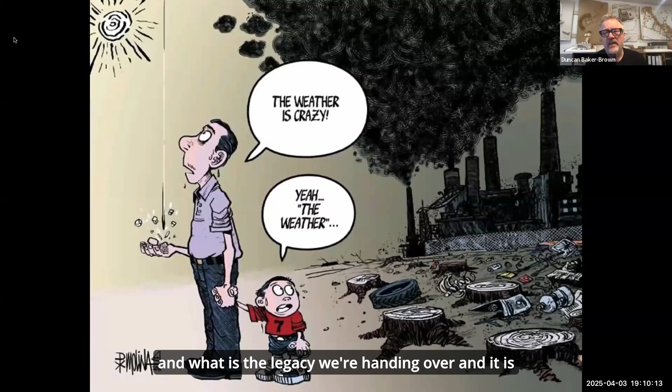And we're really in this situation where the grown-ups and the really old people are in charge, and what is the legacy we're handing over? And it is quite scary. From the point of view of resource extraction, which is something that concerns me, 10 years ago humans extracted between 45 and 60 billion tons of raw materials every year from planet Earth. Move forward a decade to 2024, that's nearly up to 140 billion tons of stuff. Raw materials mined and harvested by humans every year.

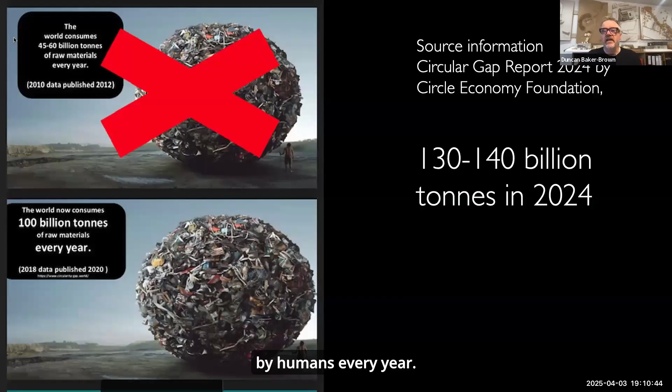This is a recent news item from The Guardian saying that that's going to increase by 60% by 2060. A UN report says that, and I think it's easily going to do that because it's doubled in the last 10 years. So another 35 years from now, I think it's easily going to double again, unless we do something about it. But yeah, that's 2025 so far.

Nutty geopolitics, wars, and MAGA tariffs. And resource security being a thing of the past. We don't know how much things are going to cost, let alone whether we can get hold of them in the first place, or whether we want to because of the problems associated with extraction of materials and harvesting of stuff, the collateral damage caused by doing this.

So why us in the construction industry? Well, the construction industry consumes 50% of those billions of tons of stuff that's mined and harvested every year. Half of all the stuff is consumed by our sector across the world. And it's the environmental destruction associated with this process that is one of the main factors for generating the current

mass extinction of species. Taking it back to the UK, in the UK, we consume 600 million tons of products a year. That generates a waste flow of about 200 million tons of waste a year. And the construction sector is 63% of that 200 million tons, 120 million tons of material goes to landfill and incineration, and it's from our sector, the construction sector. In addition to that, you can say that our industry is also about 45% of carbon emissions.

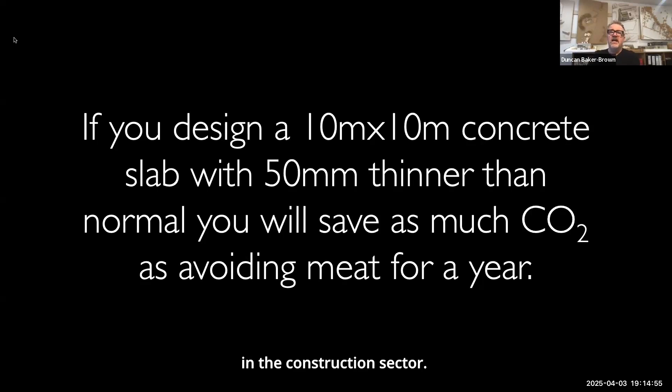So some good news. Well, we actually know what to do. And we're a really impactful industry in the construction sector. If you design a 10 meter by 10 meter concrete slab and you make it 50 millimeters thinner than normal, you'll save as much carbon as avoiding meat for a year. The other good news is that everybody's still asking, what is a circular economy? And here you can see I've got two circles.

One's the biosphere, the natural organic stuff that grows, locks carbon when it grows. We process it and make it into things. We use those things. We might repair those things again and again. And as long as we don't add toxins to those timber things, for example, they can eventually go in the ground and become compost for new things to grow. However, that's only a minor part of what we produce as humans.

And we're a lot more likely to be producing stuff in what we might call the tech sphere. So that's materials, minerals, metals, whatever, that create our smartphones, our cars, our furniture, the televisions. These things need to be designed so they are material stores for future things, because these things can't be returned back into the earth. So think of current BMW cars have to be the source material for future BMW cars. That is the challenge for all designers. Current buildings are the material stores for future buildings.

Now, more good news, the Pritzker Prize, the biggest international prize in architecture, was won a couple of years ago by David Chipperfield, well-known architect, saying retrofit, which is reuse and adapt the existing, is not only the right thing to do, it's the more interesting thing to do. And I agree, it is. Adapt the existing thing. We've got movements like the wonderful Don't Waste Buildings, campaigning to stop demolishing buildings in the UK.

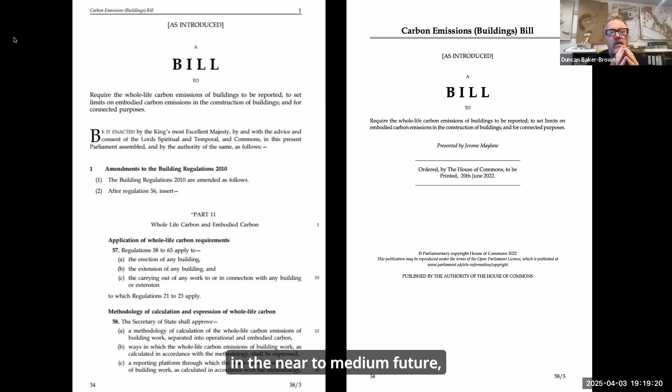So perhaps we'll get one of these soon. This is one of three bills that were presented to the Conservative Party when they were in government between two and three years ago. These are 10-minute bills asking for a whole life carbon, embodied carbon bill, and that almost got passed with a Conservative government. So I'm hoping if this gets represented in the near to medium future, it will instigate what we've been looking for for ages, which is what some people are calling Part Z.

That's the part of the building regulations that will benchmark and legislate for embodied carbon. As soon as you're limiting embodied carbon in a construction project, you're limiting the option for demolition, throwing away and starting again, because the whole life carbon footprint is just too excessive.

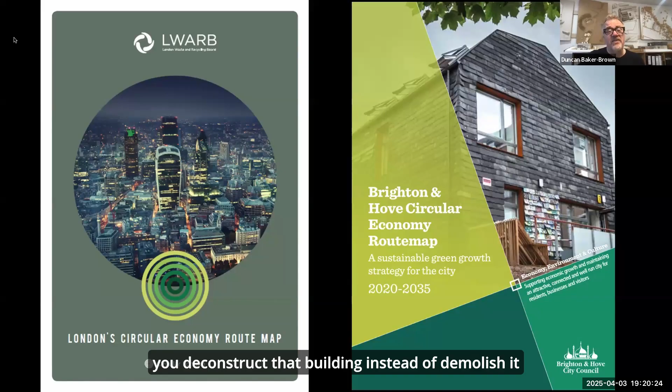The other good news is that now up to hundreds of towns and cities in the UK have circular economy route maps, and they are impactful. In London, as part of the London Plan, the circular economy route map has encouraged startup companies who do deep surveys of existing buildings so clients understand the material resources of their buildings. If you have a project over a certain size in London that you want planning approval for, and it involves demolition of a building, the Mayor of London's going to make you deconstruct that building instead of demolish it, and look at ways you can reuse those elements. The same for the Brighton and Hove circular economy route map, which I was involved in writing.

Most stuff manufactured and consumed flows into cities, whether that's water, food, clothes, or construction materials and products. But at the moment these things flow in and flow out, and these different flows don't talk to each other. If you're trying to instigate circular economies, some of these linear flows in and out have to turn back onto themselves, turn into circles, perpetual circles, where there's no such thing as waste. Waste from one of these flows is a resource for a neighboring flow.

So we need to consider our cities as material stores for the future. We need to become urban miners searching for new material sources to reduce the need for natural raw materials. This is something we did years ago, over ten years ago, we built this. Well, I say we built it, over 360 students built it. It's the Brighton Waste House, and it's actually Europe's first permanent building made of 90% material discarded by others. But if you say it's a permanent public building and it performs to Passive House standards, it's a world first.

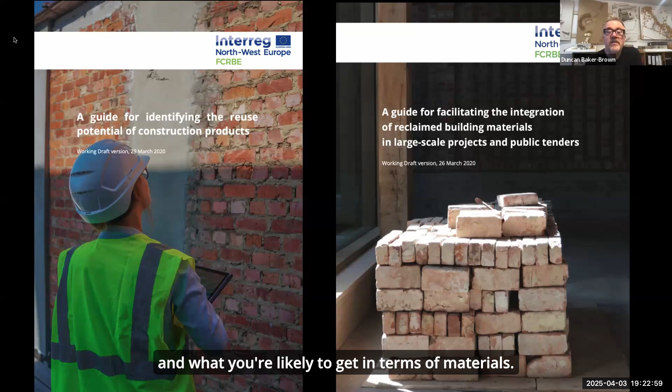And they're guides to how to identify how to deconstruct buildings from different eras and what you're likely to get in terms of materials. And this is the obvious one, bricks from buildings with lime mortar joints, sort of 19th century, early 20th century buildings. That's the easy stuff. But what about the 1960s buildings with a lot of concrete, steel and glass? So guides on what to look out for.

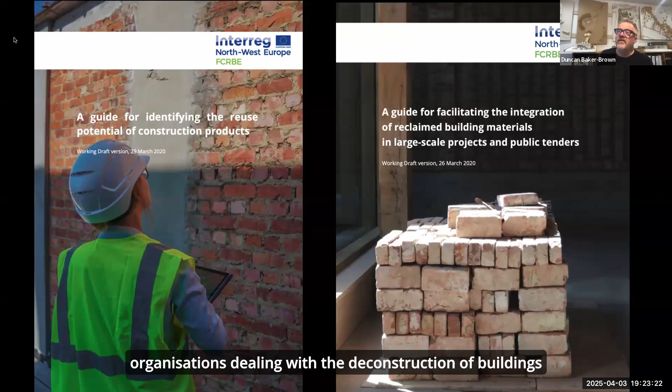We're putting together a directory of over 1,500 organizations dealing with the deconstruction of buildings instead of demolition, and crucially the reuse of those deconstructed elements. And that's across 6 countries who took part in this project.

Now, my main role was to curate a summer school, which was going to happen in Brighton in 2020, which was obviously the lockdown year. And we called it the School of Reconstruction. And originally it was going to be in August 2020. And the city of Brighton gave us this school, this secondary school to borrow for three weeks.

And we invited students from across those 6 countries, engineering students and design and architecture students, to bid for the 80 places to take part in the summer school. And we got 80 students. And the people you can see there, they're the team leaders. They were working mainly in pairs.

So we had this lovely situation where the city of Brighton were prepared to deconstruct a building that they'd previously put aside for demolition. So they were really helping us. I actually had to write a brief for a demolition company to deconstruct rather than demolish. So carefully take a building apart and then stack those parts up in the playground where our School of Reconstruction was. And then for 3 weeks, we had 10 teams of 8 students. They were going to reappraise this material.

What was really interesting is that the city were then prepared to put the material out into their supply chain and see if anybody would go anywhere near this secondhand material. And that would have been amazing, but for COVID. So what you're looking at here is the event didn't happen, we then did it online a year later. And the reason I dwell on it is because a year later, obviously we lost the face-to-face aspect of it because we did it online.

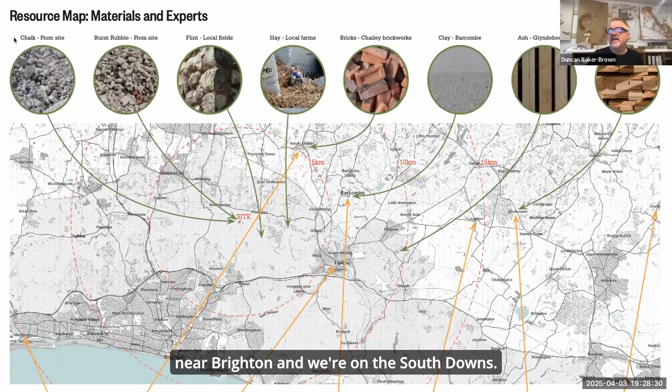I'm actually going to talk about one of our own projects. So we're based in Lewes, near Brighton, and we're on the South Downs. And this is a resource map that we do. We do one of these for all our projects. We look at the materials on the site, what it offers, and then what materials and resources are nearby, 5 kilometer, 10 kilometer, 15, 20 kilometer radius.

And that can be all sorts of things, waste materials from factories, from building sites. We actually locate planning approval sites, and see if those sites have had their F10 certificates issued, which means they've started on site.

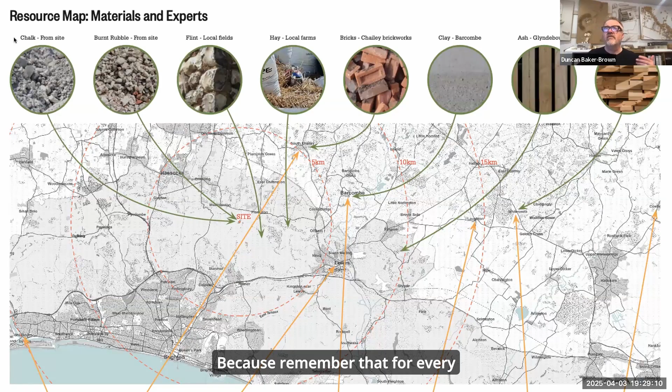We look at what the project is and what the likely waste flows from those building sites are, because remember that for every 5 or 6 houses we build in the UK, 1 house worth of waste goes to landfill and incineration. So there's lots of waste flows from our industry. There are also these other things going on.

So unfortunately, we've got this catastrophic ash dieback that's passed through Asia, Europe, and now through the UK. We have got tens of thousands of ash trees being chopped down at the moment because they've got this fungus infection, and they're being chipped and burned, which is a travesty, because all these organic things that grow lock carbon. The last thing you want to do is burn them because that releases the carbon.

We had a project at Glyndebourne Opera House, and while we were designing the project, they were chopping down 400 of these trees that had ash dieback. And these trunks here were just getting on a lorry there to be sent to a power station to be chipped and burnt.

We rescued them. We had a timber expert have a look at them, and he thought that they were reusable. So we got them sawn into planks and dried, and then we put them aside for the project. We then had another situation with a project on the South Downs where a house burnt down.

The original project with Glyndebourne Opera House didn't happen because post-COVID, they didn't need the accommodation they thought they needed pre-COVID. A lot of performance buildings, theatres and cinemas, etc., are suffering from reduced numbers of people going to see them. So we had this ash dieback timber that we were able to sell to the client who was having to rebuild this burnt out house.

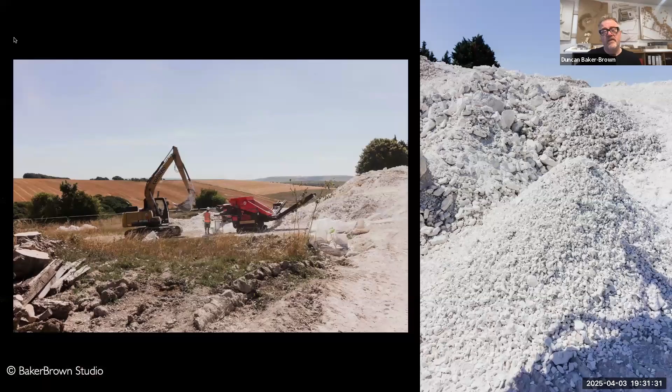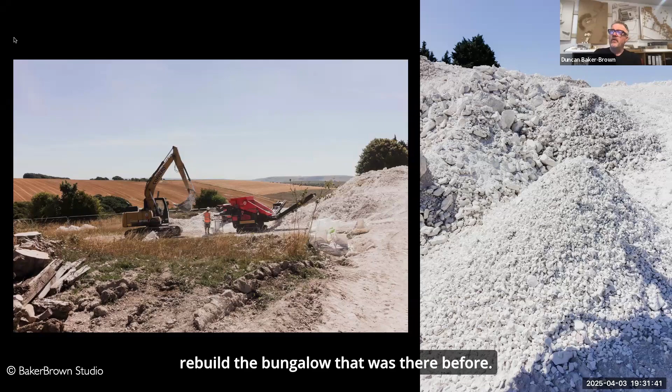The South Downs National Park wouldn't let us, and well, not that we wanted to either, but they wouldn't let us rebuild the bungalow that was there before. And by the way, it is a bungalow, but it was an 8-bedroom bungalow. It's massive. So they asked us to cut and fill the new building into the south-facing slope of the downs where the bungalow had sat.

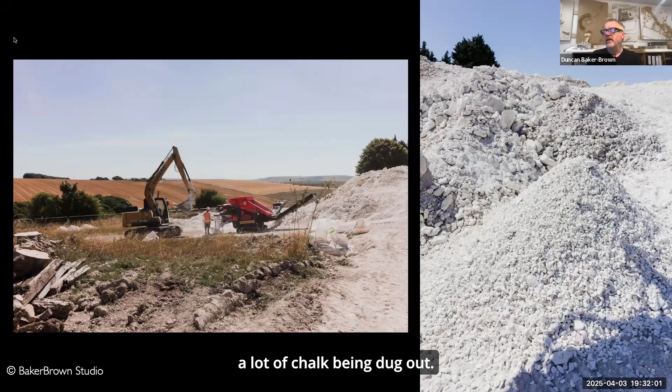And so from the point of view of people walking past, what they saw was what looked like a quarry, a lot of chalk being dug out. But I can say what you're looking at there on the left is the chalk being reprocessed. So it's been ground down into smaller elements so we could use it to create plaster for the new house.

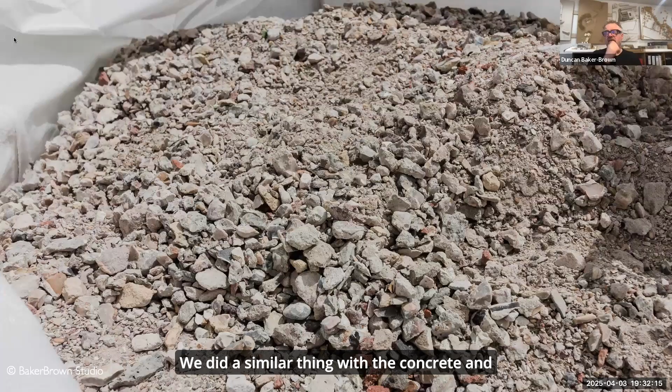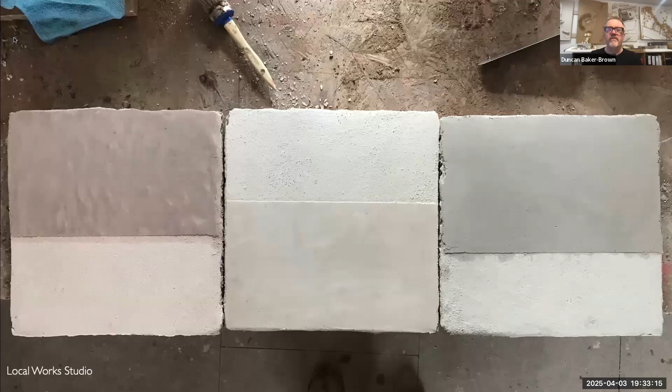And here we're looking at samples for plaster for the walls and ceilings in the new building made out of chalk from the hill that we cut out to allow the new partially subterranean house. But also we used clay from the bottom of the hill, which is this slightly off-white, beautiful stuff. So we mixed the clay and the chalk together and we made plaster for the interiors of the building.

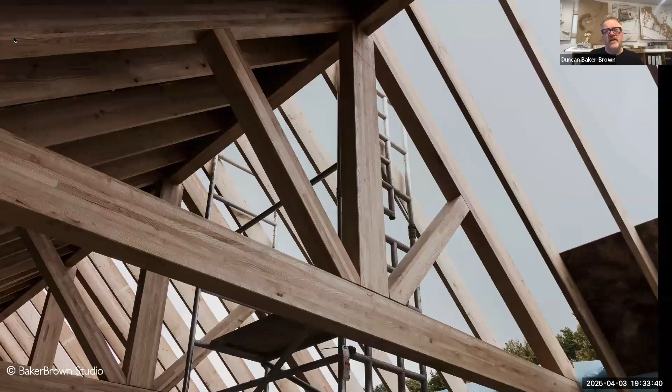And here you get a glimpse of what we did with the ash dieback. We turned it into glue laminated trusses and beams and rafters for the new building. And here it is emerging. So the timber cladding for the barn-like elements is actually, in this case here, sweet chestnut. And we used sweet chestnut from local coppices.

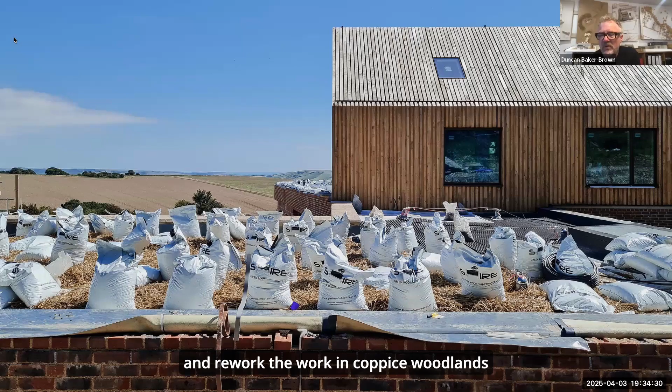Sweet chestnut is almost like a miracle material. The Romans brought it over. The timber is really durable. And a colleague of ours did research about 30 years ago that proves that quick growing sweet chestnut that was only 25 to 30 years old was more durable than 100-year-old oak. So leave the oak trees alone, let them support 2,500 species and rework the working coppice woodlands that the Romans originally brought over because they knew how useful this timber was. And we then developed it more in the Middle Ages right up to the 1980s. And it's only been the last 3 or 4 decades that it hasn't been used so much.

Now, what's amazing about this is if you rework those coppice woodlands and start getting a crop of timber off those woodlands in a 25, 30-year cycle, you get a greater level of biodiversity than if you leave those woodlands alone. So I would say that that is an example of regenerative design.

If you don't know what coppicing is, it's where you cut the tree down to just above the ground and the roots live. And when the sprouts come up again, you don't just get one trunk, you might get a cluster of 8 or 9 sprouts and poles, and then they're what grow on a sort of 25-year cycle.

It's a super deep carbon sink because the roots are established. They can be hundreds of years old. And so as soon as the growing starts immediately after you cut the previous growth back, it's a carbon sink. Whereas if you clear fell, say, an oak woodland or softwood pine woodland, you then plant new saplings, and it's not for 50 or 75 years that woodland becomes a carbon sink until they've established.

But coppices are amazing. And this is the building set in its site, and that is where the bungalow had been. The other thing that was quite controversial is you couldn't see the bungalow before because there were 75 trees in the way of where the house is now.

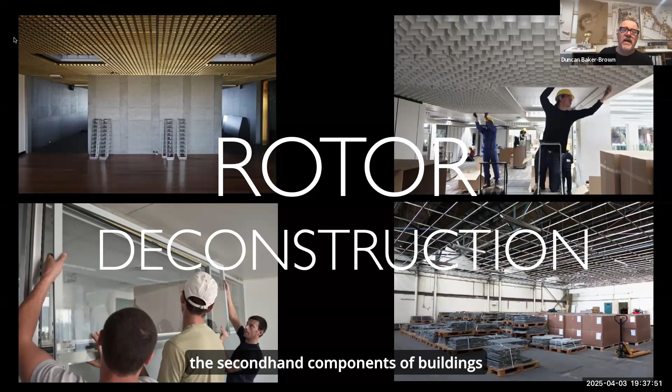So step 2 in the book is about reusing stuff. Now, one of the best people at doing this are Rotor Deconstruction, based in Brussels. These photographs should be read from the top left to the bottom right. They unpack buildings and redistribute the second-hand components of buildings across Europe. So this is a bank building being deconstructed carefully. You can see it ends up in packing cases. They're working on this building. This is a book you can buy.

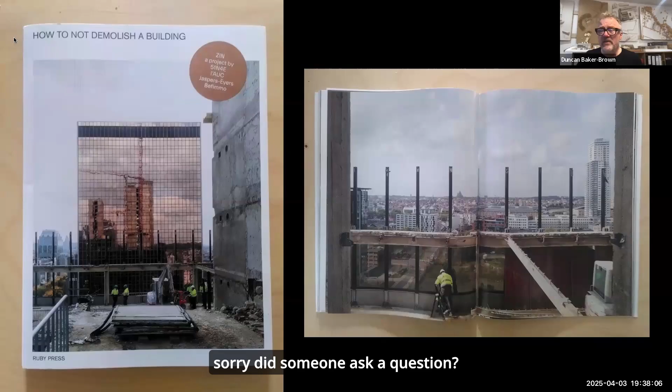Sorry, did someone ask a question? Yes, I can do. Sorry to interrupt. You go, Dipti. Okay, yeah.

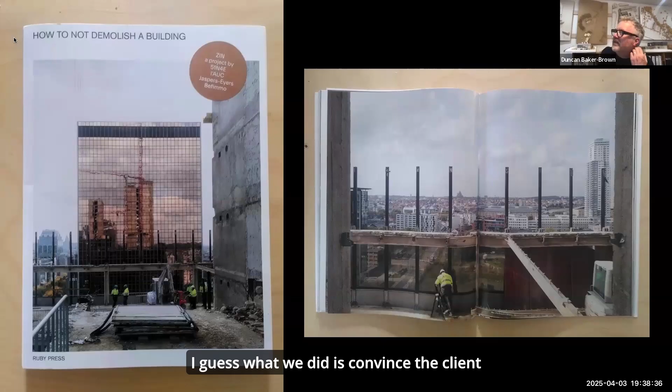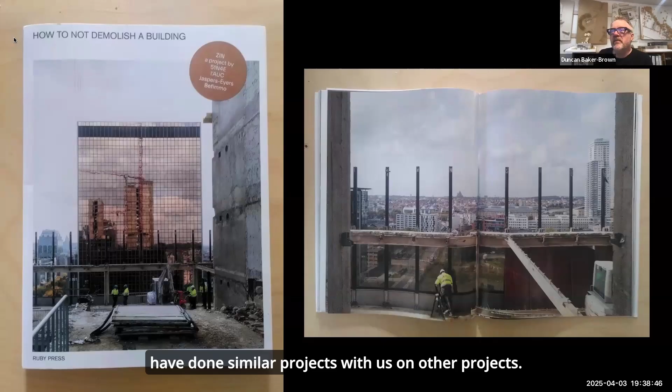So the question is, was it the client who helped bring in and believe in this approach for his house? I think it's about who drove the decision. No, no, we brought that to the project. So that was quite interesting. In effect, what we did is convince the client that it was a cost-effective, viable thing to do. And the building contractors who we work with have done similar projects with us. So we were able to prove that it would be cost neutral.

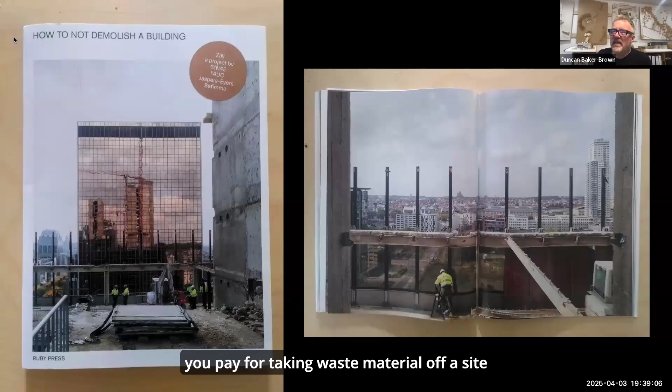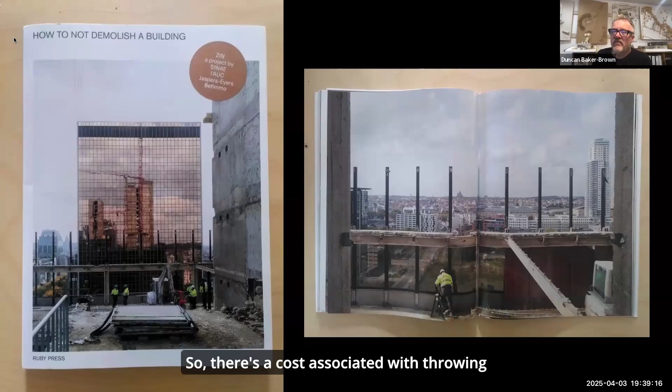And because we're stuck on the top of the hill with poor access, on any job, if you take waste material off a site, you pay landfill tax and you pay for taking waste material off a site and getting it burnt or sent to landfill. It's mainly burnt where we are. So there's a cost associated with throwing stuff away legally anyway. So to leave it all on site and reprocess it on site can be a cost-effective way of doing it. It's just not a normal way of doing it, or it's not the way we've done it for 100 years.

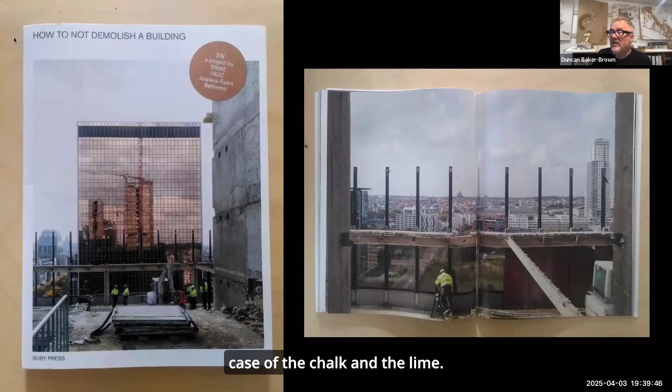So a lot of what we're talking about is remembering how things used to be built. They're now called conservation-type ways of building with vernacular historic materials, building out of the landscape in the case of the chalk and the lime. With regard to the plaster, it was interesting because there was a point when the contractors slightly lost their nerve and they didn't want to do it, even though they'd done it before for us.

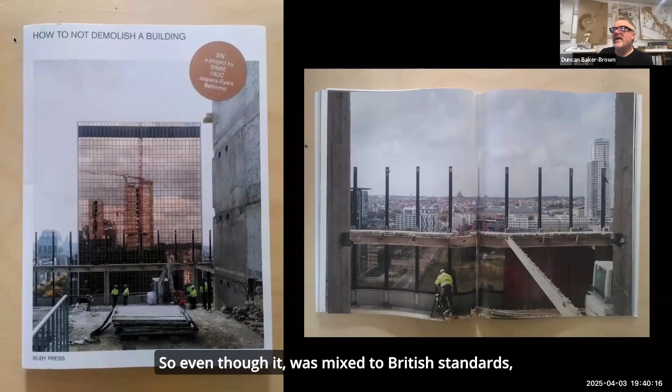And it was literally a case of the chemical profile of the plaster they were putting on the walls was a normal clay plaster. But normally that clay plaster comes in branded bags. And this clay plaster came from the site. So even though it was mixed to British standards, had the chemical DNA that would match the stuff that came out of a factory from the West Country, it was just the fact that it was done like that that made the contractors lose their nerve. But it's been perfectly fine.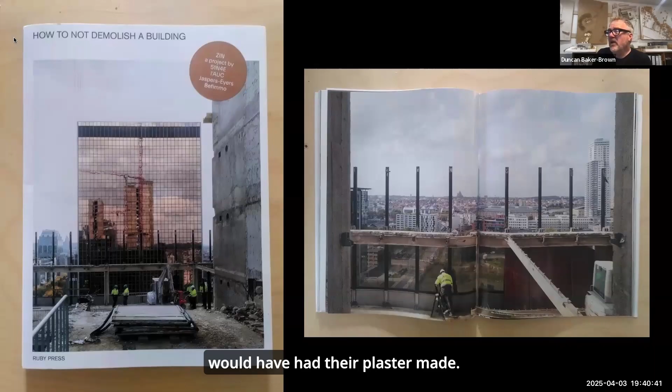And it's the way every historic building in the UK that has lath and plaster or clay or lime plasters would have had their plaster made. So it's a bit of loss of nerve sometimes. But what we've got to guarantee is that the building is done to British standards, codes of practice, and building regulations, and that's what we do. So it gets signed off. It's got the performance warranties of a normal building.

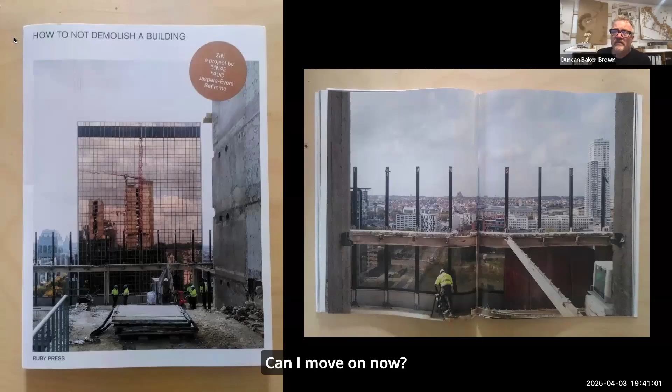I'm going to. That's a follow-up, I think.

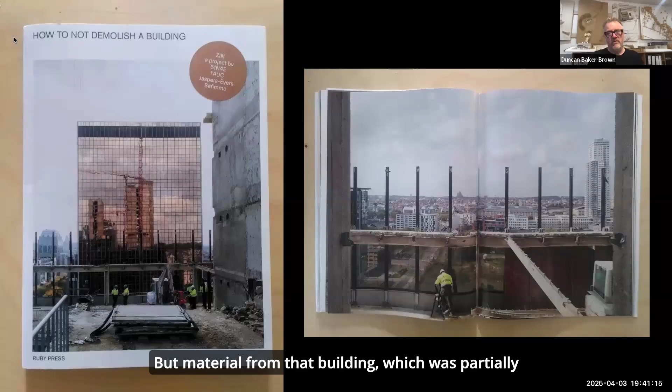Yeah. Okay, so this is Rotor. They have a warehouse where they sell all sorts of things, but material from that building, which is the World Trade Center in Brussels, it was a sort of adaptive retrofit project. So in some elements, they were reducing the width or the height of the existing towers, as you can see.

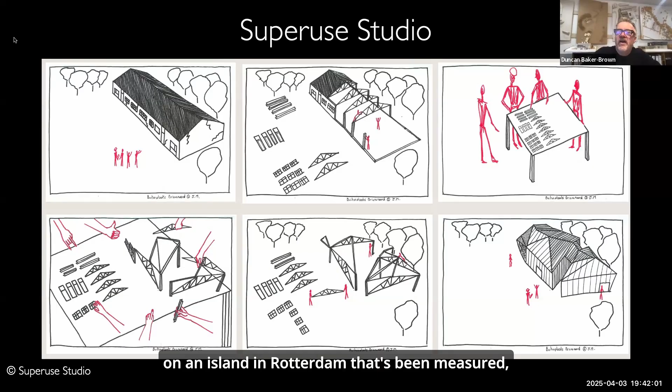This is another project by sort of reuse pioneers, Superuse. And what I like about this is this lovely storyboard, very simply drawn, and you read it from the top left to the bottom right. And it's the story of a derelict school building on an island in Rotterdam that's been measured, deconstructed, and reassembled in a different way. So you make your new building out of the old building.

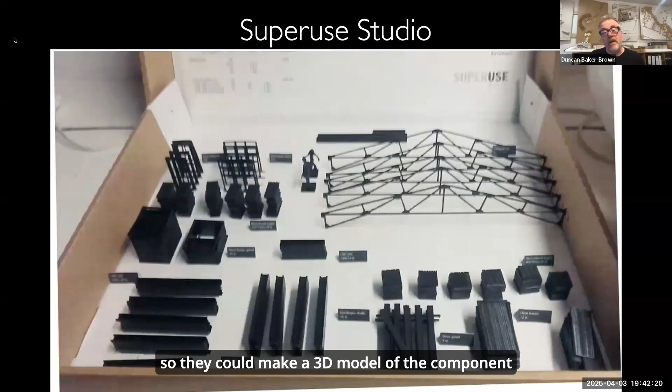And so here's the partially deconstructed old school building. Now, what they did is a 3D survey of that building so they could make a 3D model of the component parts of the building, and then they could play around with those parts. And the new building is still a school building again, but it's sort of a dance academy, and they worked with some of the kids that would be using the school and let them play around with these elements. So it's a bit like a game.

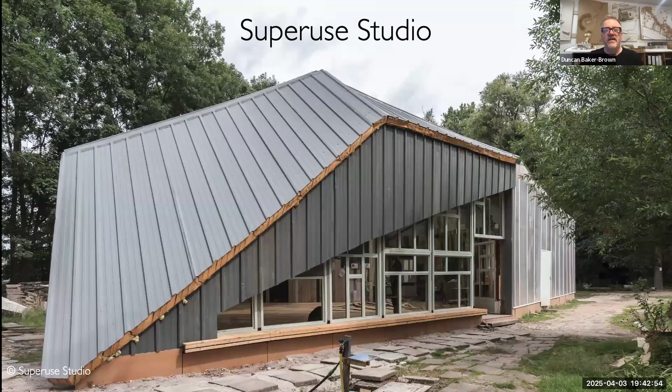And of course, they put the elements back together a bit differently. And then Superuse learned from that, and they did the real thing a bit different. So whoops, there it is. That's the new building made out of the old building. And it's deliberately designed so it looks like they've imported new insulated sandwich panels from industrial buildings. Looks a bit unfinished there, but the idea that you could make something new out of what you had in the first place.

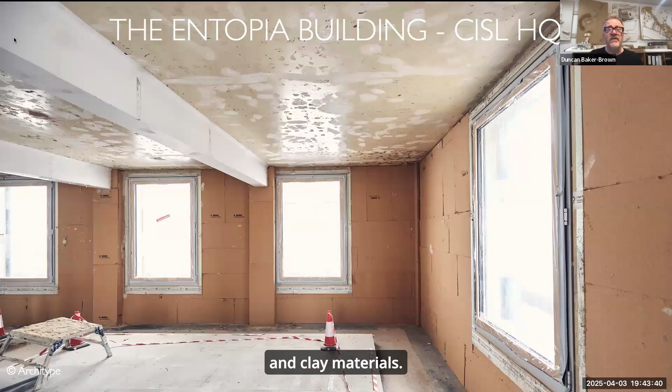And that's unusual. So one of the reasons I would say that the UK construction industry is more wasteful than others is that we do build a lot of tall commercial buildings in our financial districts like the City of London or in Manchester or Glasgow. And these buildings, they have these sacrificial interiors that are called Cat A or Cat B fit outs.

And what landlords will do is in brand new buildings, they'll fit out the floors of the building so people who are thinking they're wanting to lease a number of floors of the building will see it fitted out. But then, of course, if they say, I'll take 3 or 4 of these floors or all of the building, they then want it branded with their own company brand. So the first thing that happens is all the stuff you're looking at gets torn down. And honestly, this stuff is installed with an expected lifespan of 3 months, and then it's thrown away.

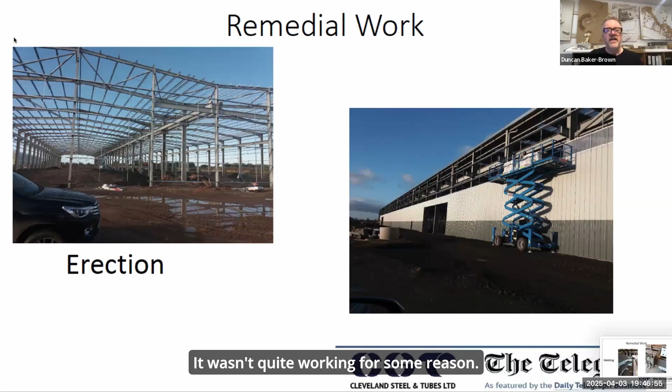And it wasn't quite the same as the BIM model. They had to introduce some new steel elements. It wasn't quite working for some reason, and they had to faff around with it quite a bit. So it wasn't straightforward. But to cut to the chase, they saved £969,000 on a £5 million project, which is a big percentage. It's 20% of the cost of the build of a new one. So the point is, by going through an exercise which is unusual, finding an existing building that was due for demolition, deconstructing it and exporting it to where it needs to be and rebuilding it, saved them a lot of money.

And this is what they do, by the way. For the last 40 years, they've been receiving and procuring steel tube. And this is the material, it's excess from the oil industry, from pipelines, and what it's normally used for is sports stadiums. So the London Stadium, that was the Olympic Stadium in 2012, the tubular steel structure there was from this source. And Spurs' new stadium, etc. Now, the reason why that's quite interesting is because what Cleveland Steel are used to doing is giving warranties to second-hand steel.

Fast forward to now, and they're not just working with tubular steel, they're working with deconstructed steel frames from buildings and giving that steel framework a warranty. So they've become a case study for giving design performance warranties to second-hand steel, so other people will follow. And this is what we need to establish a proper circular economy industry, is the precedence of different elements of a building getting the warranties that it requires. So here we've got steel frames.

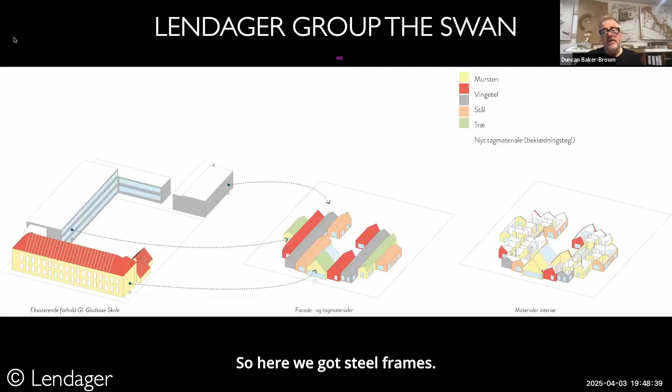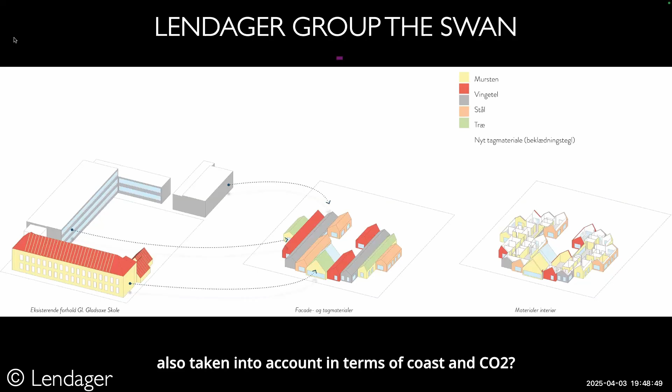Duncan, we have a question about, I think, the previous building, the Cleveland one. Was the transport from Ireland also taken into account in terms of cost and CO2? Yes. Yeah, so it was shipped over the Irish Sea and then driven on the motorway to Yorkshire. Yeah. Thank you. But well done for bringing it up as an issue. So you never get away with a zero carbon project, really.

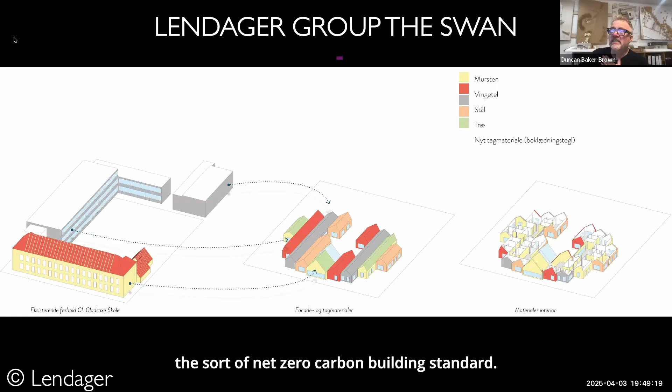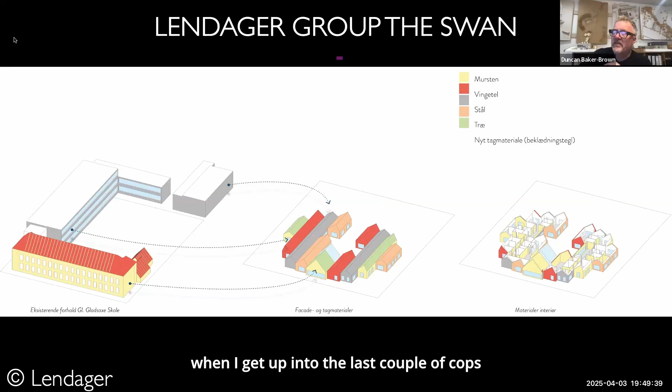I mentioned earlier the net zero carbon building standard. One of the things we talked about, because I was on the governance board for the net zero carbon building standard, was that we wanted to ditch the net word. And I was at a conference yesterday, and we had the CEO of the World Green Building Council there. And I've been to the last couple of COPs representing the RIBA, and what's interesting there is that the World Green Building Council and other people talk about near zero, not net zero. And I think it's really important to talk about near zero. So get as near to zero as possible, but you've just got to be honest about it.

In this case, of course, if the building is in Ireland, there's going to be some sea miles and road miles attached to it. But it's got to be better to be reusing a building than to be manufacturing new steel with that carbon footprint for your building. That's my point of view.

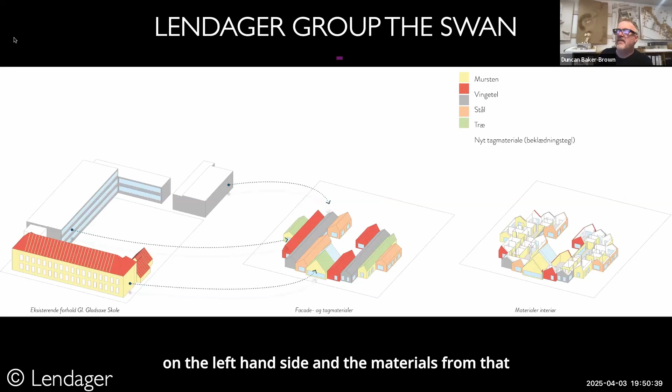This group of architects and designers are based in Copenhagen in Denmark, and it looks like Lendager, but they're actually Leniger. And what they've done here is the diagram shows an existing dilapidated school due for demolition on the left-hand side, and the materials from that building being deconstructed created the new school. And here we go. These are drawings.

I'm quite interested in how architects are drawing for deconstruction and reuse. And this is a new classroom made out of elements of the old building, including the image on the right, which shows how existing trusses have to be put at closer centers because new loadings are increased compared with 100 years ago.

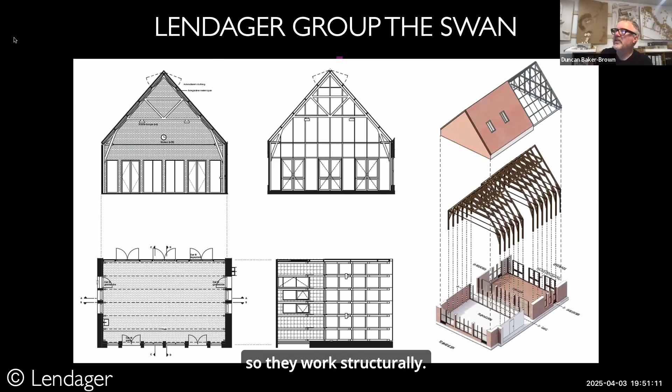And so they're using them a lot closer centers, so they work structurally. But they're also having to introduce new steel elements to make them work as well. But it's quite a nice drawing that shows what's existing and what's new.

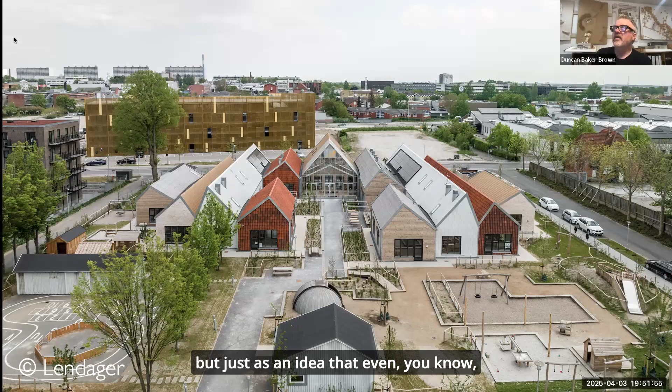And then that's the new school made out of the old school. Now, I'm not commenting on the aesthetics of it, but just as an idea that even that collection of buildings from different eras was able to be deconstructed to a greater or lesser extent to create this new building.

So I'm going to pause here because I want to ask you this question. What do you believe are the biggest challenges in specifying second-hand building materials? And I'll stop sharing my screen now. So if you could all scan the code again, if you have it open, then the question will pop up on your screen. So based on what you believe are the biggest challenges, put in your words, and you'll see a word cloud pop up.

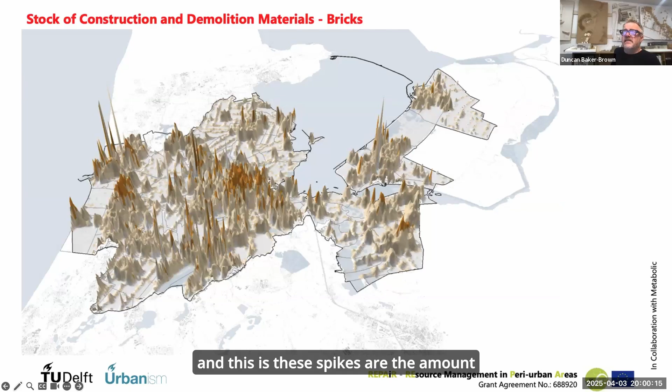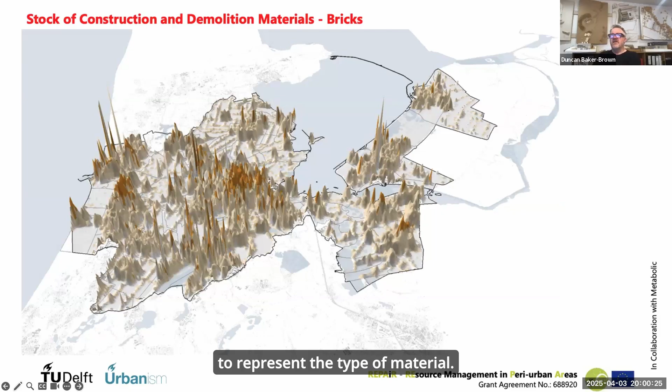Now, that includes mapping the sort of DNA of the built environment. And these spikes are the amount of materials on a particular site, and they're color coded to represent the type of material. So that's a sort of high level resource map of Amsterdam from the point of view of the construction sector. This is sort of the opposite end of it. This is a sort of micro granular survey of one element of a large hospital complex in Amsterdam that's due for demolition.

And this is research work from about 5 years ago by someone called Dr. Elma Durmisevic. And what you're looking at there is a color-coded model that comes out of a 3D survey that you can plug into Revit. And the color coding doesn't talk about the material type, it talks about the quality of the material. So the ability of it to be reused, and as you can see, as a color coding on the left-hand image of green down to red, the ability of the element to be reused or not. And there's the color-coded 3D survey there. So it's looking at the resource potential of this building.

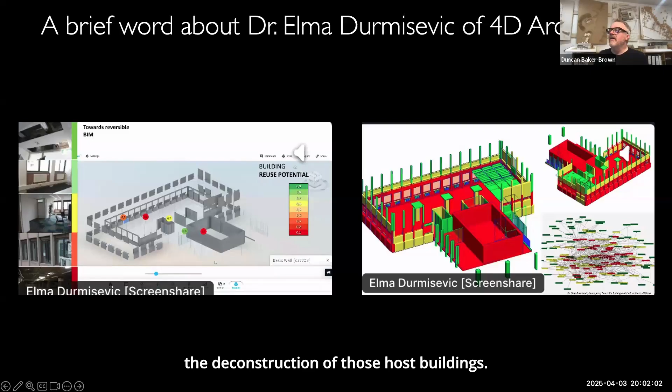And Elma was telling me recently that in this hospital complex, they've measured and understood and surveyed the type and quantity and quality of the steel frame. And that steel frame is currently for sale. And if anybody buys that steel frame, this building will be deconstructed. If there's no sale for the secondhand steel frame, the building will be demolished as normal. So I do know of buildings across London that are being surveyed at the moment for their steel, hundreds of them, and new buildings being designed anticipating the deconstruction of those host buildings.

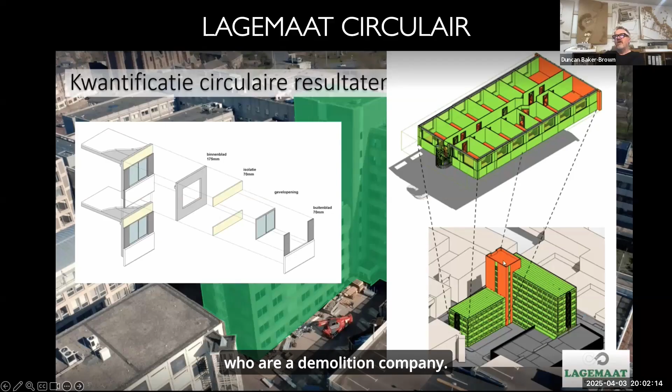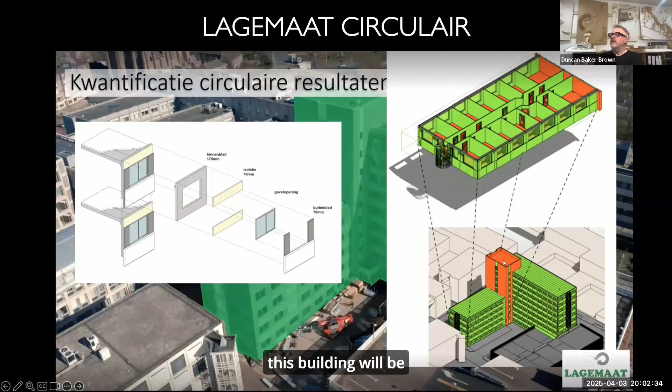Now, this is exactly the same model as Elma Durmisevic, but this is last year, and this is by a company called Lagemaat, who are a demolition company. They're doing exactly the same as Elma. They're trying to ascertain the resource potential from this existing building. And you can see that window and panel system being digitally deconstructed for its elements. If they can find a market for those elements, this building will be carefully deconstructed rather than demolished.

Obviously, the most obvious thing to do in the world of reduce in the construction sector is to retrofit, to rework the existing built environment without knocking it down, deconstructing it, or whatever. And creative reuse and adaptive reuse, I think, is a huge creative opportunity for us all. And a lot of it is looking less creative, but it's still really vital.

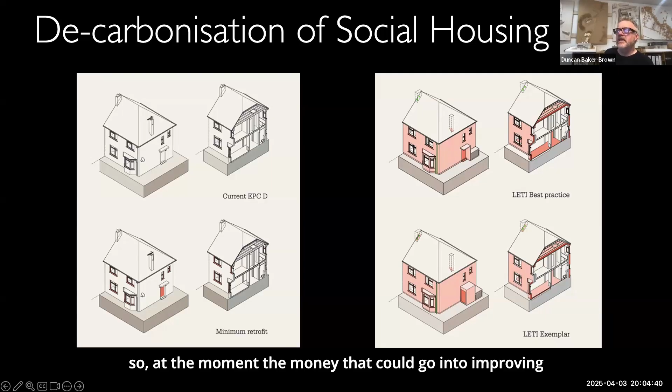So obviously, we've had a cost of living crisis where our energy bills have gone through the roof. Our buildings are unaffordable to occupy, whether they're public houses, leisure facilities, or our own homes. And our energy bills have been capped, but really the government are paying the fossil fuel procurers the additional money. So at the moment, the money that could go into improving the thermal performance of our housing stock, which is notoriously bad, has gone to line the pockets of those fossil fuel procurers.

It's just absolutely mad. But before all that happened, we were commissioned, my practice and the University of Brighton, a sort of joint venture with 10 other consultancies, to create a retrofit route map for 55,000 social homes across 7 local authorities running from Crawley down to Brighton and a couple of local authorities east and west of that. And what they found out was that across those 7 local authorities, there were only 8 house types, ranging from semi-detached bungalows to blocks of flats.

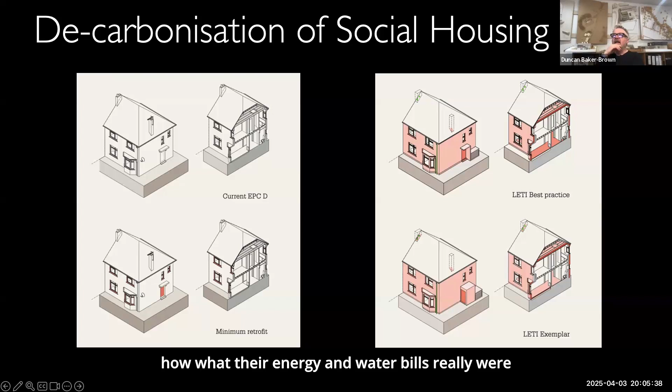And we undertook a deep survey, and I won't go into all the different ways we surveyed it, but we were looking at how those buildings really performed, what their energy and water bills really were, and where the buildings really leaked energy and heat, etc. And we were then tasked with proposing solutions to get existing buildings up to EPC C, or then LETI best practice and LETI exemplar.

And LETI at the time was the London Energy Transformation Initiative, and they have, in a very positive way, defined a sort of whole life carbon plan for the construction industry. Their climate emergency design guide from 2020 was really impactful. It had over 1,000 people taking part in the creation of this document.

And one of the things they've brought out since is a guide to retrofit. So they came up with this idea of their best practice and exemplar level. If you're doing a LETI exemplar retrofit project, it's basically a sort of Passive House standard retrofit. So we were looking at the cost implications of that.

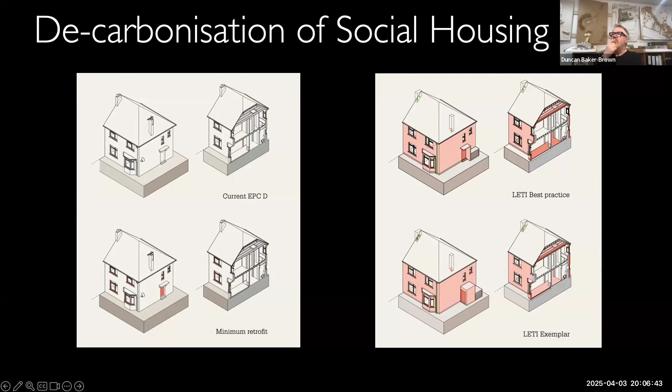Unfortunately, what happened after the 2-year study, and here we are with the larger buildings as well, after working on it for 18 months, the cost of living crisis really kicked in, and social landlords weren't allowed to add increases to the rent, of course, because people were paying enough for the energy. So they didn't have the budget they thought to do this. So this project's been parked.

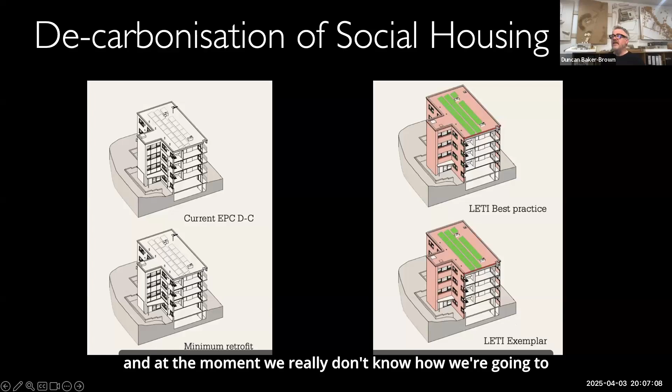And at the moment, we really don't know how we're going to afford to retrofit our buildings. So we really need creative responses to this, a sort of financial creative response, as well as the physical architectural response. But I'd also say this is another project of ours.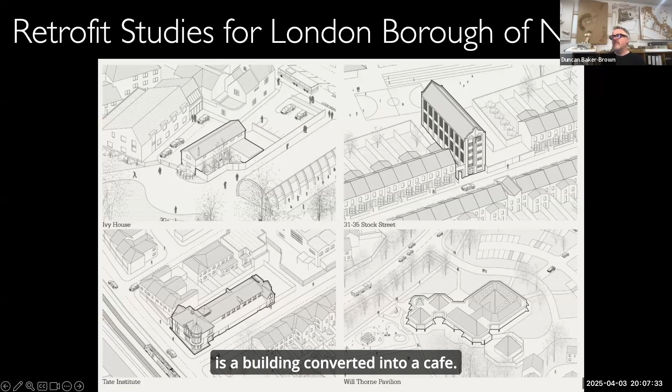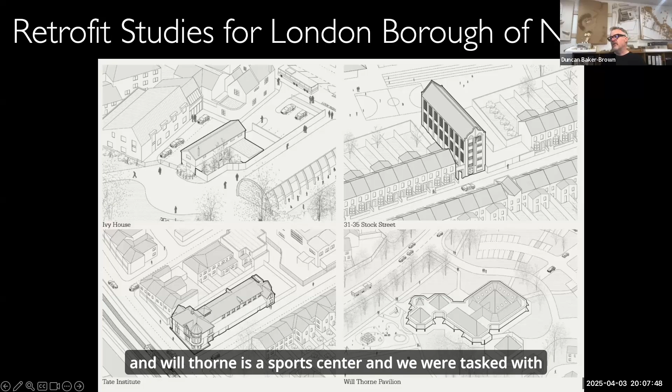The London Borough of Newham gave us 4 totally different projects. So top left, Ivy House is a building converted into a cafe. Top right, Stock Street is a 5-story Victorian warehouse converted into serviced office space. Tate Institute on the bottom left was an old theatre and community building, and Will Thorne is a sports centre. And we were tasked with coming up with retrofit strategies for these totally different buildings from totally different eras.

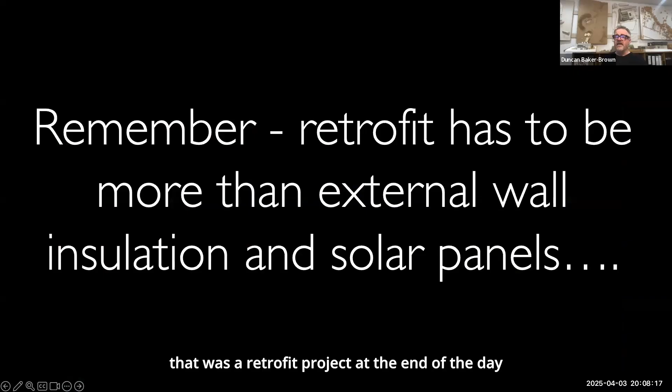But Lacaton and Vassal, who are Paris-based architects, they went to the mayor and said, we can give you your new tower for 2/3 the price. So here it is, retrofit costing a lot less than new build. And all they did, this diagram shows it, there's the existing, a single notional flat there on the left-hand side with the existing glazing and concrete panelled wall.

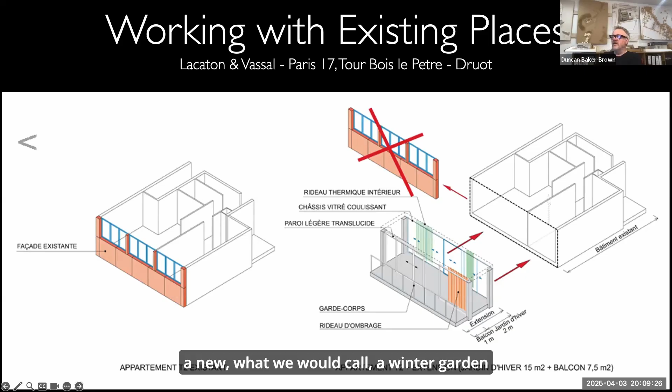They literally just took off the old panelled wall and bolted on, this is what the right-hand side image is showing, a new, what we would call winter garden, which is a steel frame little glass house really, with sliding glazed panels, double glazed, next to the edge of the original flat, then a 2-meter extension, and then another set of glazed panels. Notice they've got blinds on the inside to reduce glare, and they've got a balcony which will shade you from excessive sun in the summer. And here you go, here are the winter gardens being applied to the old building.

And what's quite exciting here, and what's brilliant, one of the benefits of retrofit is that you don't destroy communities. So people lived in this block of flats while this work was being done. They had to stay out of their flat for a day while they bolted on one of these winter gardens. But apart from that, they were on site. And there's a book written about this project, and the tenants are complaining about the dust and noise of the project. But you know what? At the end of the day, they weren't disbanded.

So before you had cold winters, damp winters, and with condensation, you've got overheating in the summer. You've got lights on during the day because there's hardly any natural light. There's no ventilation. And you get all of that fixed with this winter garden. And I haven't mentioned it, but you get an extra 15 square meters of floor area for nothing. And your utility bills have just reduced by 50%. Now, the architect behind this, Anne Lacaton, when I interviewed her, she said, please don't call us a green architect or sustainable architect. This is just sensible design.

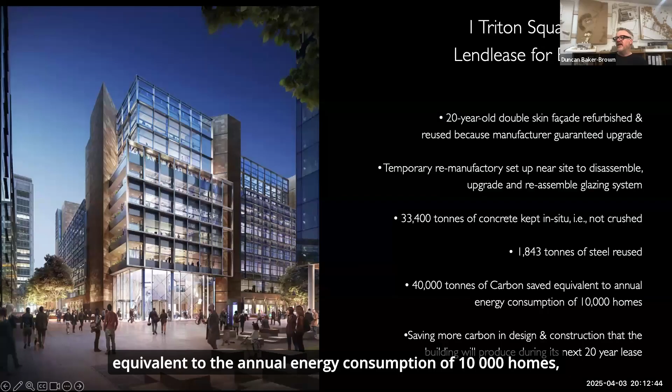And then there's a list here, because you didn't demolish it. You've saved 33,400 tons of concrete kept in situ, 1,843 tons of steel reused, etc. 40,000 tons of carbon saved, equivalent to the annual energy consumption of 10,000 homes just on one building. And there's your precedent for someone in the supply chain willing to give a warranty on a facade system.

The amazing thing about Peter Zumthor's Swiss Soundbox is at the end of its life, they took the springs off, and then you've got stacks of timber that went and supplied hundreds of building sites with timber. That is a circular economy principle, big tick.

Here's another one. This is Waugh Thistleton's number 6 Orsman Road. Now, Waugh Thistleton are a practice that are known from in the early noughties and the 2010s. They were nightclub architects. And then Andrew Waugh of Waugh Thistleton, he said to me he had his black urinal moment. And that was the point where he realized he was at 2 o'clock in the morning on a Saturday. He was online trying to find a black urinal for a nightclub he was designing. And he just thought, what am I doing?

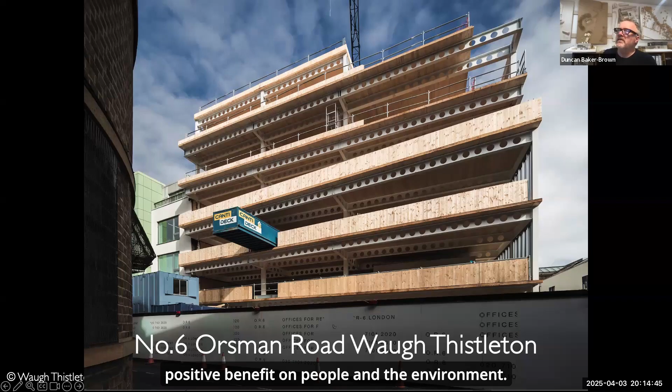So he virtually closed the practice down. And they thought, how can we have some sort of positive benefit on people and the environment? So they're now the sort of, in the UK, the leaders in CLT construction in buildings. Now this building is using CLT, but not just CLT. So you can see the steel frame here is bolted together. So one day it can be unbolted and reused, no welding. And then you've got CLT, which in my opinion, what CLT does best is providing the decks. It's very efficient in terms of the use of timber to provide the decks.

Now, what was nice about this project, or sorry, not nice, there was a challenge. The response was nice, but the challenge was that halfway through the construction process on site, a new client took over with new requirements. And one of those new requirements was an extra staircase. Now, most buildings that have certainly been built at the moment, probably the ones you can see on the horizon in this image, but a lot of buildings where I'm in Brighton, even 2 or 3 story buildings, they're made out of concrete for some reason. A lot more concrete's poured at the moment. You have concrete floors, concrete walls and structure.

And normally a building like this, which is a sort of 7-story office building, the floor decks would have been in situ cast reinforced concrete, which would have been a real pain because, like I said, the new client wanted a second staircase. So Waugh Thistleton did is they just cut a hole in the CLT floor, which they could do because it was CLT timber, and they used that CLT to make the staircase. So nothing was thrown away, a completely adaptable system. And hurrah, you got your staircase out of the hole created by the stairwell. And here you can see it installed.

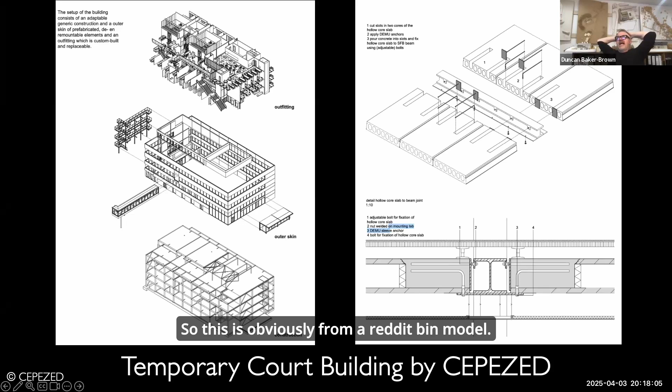And rather bravely, CEPEZED said, well, that's daft. We don't know what's happening next week in the way the world is at the moment, let alone 7 years' time. So what we'll do is make sure that our building is really adaptable and flexible and deconstructible. So they did build drawings of their buildings in this sort of layers. So you've got the top layer. I'm looking at the left-hand image now. So you've got the internal fit-out elements. So this is obviously from a Revit BIM model. And then the middle image shows the external skin of the building, and the bottom image shows the frame.

And then interestingly on the right, you've got the 1 to 10 details that show how all these things come together without sticking. And that is the big point. Do not stick buildings together, bolt them together, screw them together.

Now, I asked the project architect for CEPEZED if they could send me deconstruction photographs, because this building was deconstructed a year ago. It's been reassembled on campus at a university, and it's got a totally new life because the courthouse, 19th century courthouse, was finished being renovated, is open again. But when he sent me loads of deconstruction photographs, I realized the rather obvious thing is you can't tell if that building's being assembled or disassembled.

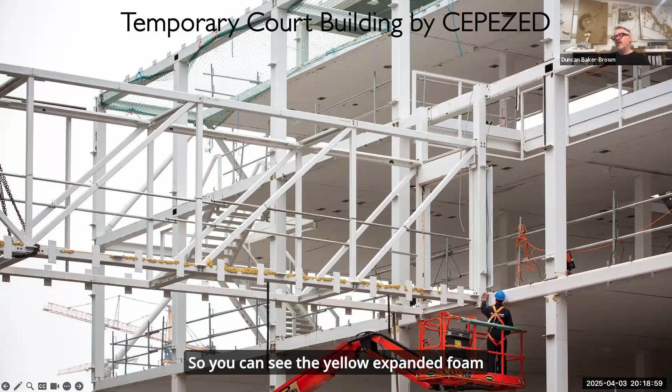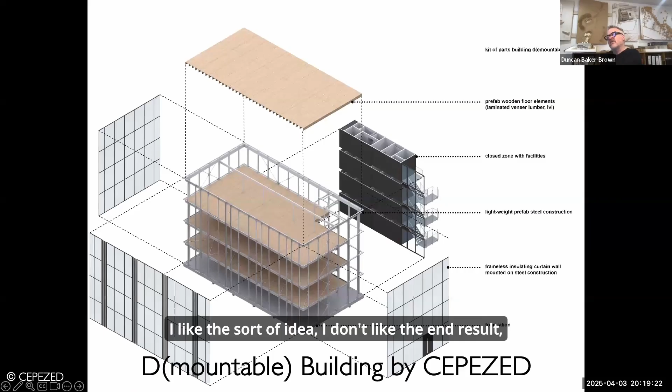This is another one of their buildings, which I like the sort of idea. I don't like the end result, but what's really interesting is, as designers, make your buildings as simple as possible. And by that, I mean, reduce the number of components and material types and elements in a building. So here you've just got a steel frame, you've got a timber structural deck, you've got a lift core, and you've got a facade. And that's really all it is.

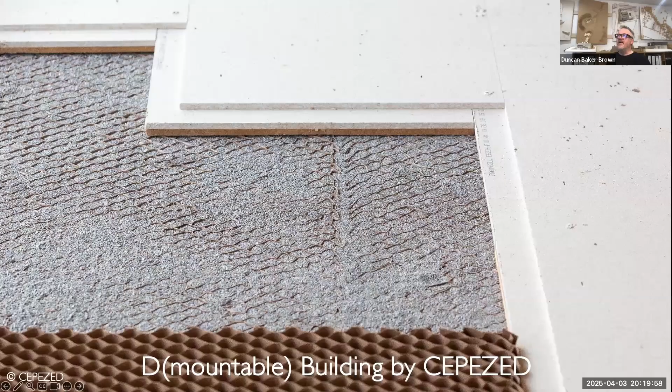I mean, apparently there are only ever three people on site to make this building, which is obviously, it's all made in a factory off site, prefabricated, and arrives on site. And even the floor system is screwed down so it can be unscrewed. So that's the soundproofing, the subfloor, and then the finishes. And that's the end finished building. This is the bit I don't like, because I'm thinking, how's that building not getting too hot or too cold?

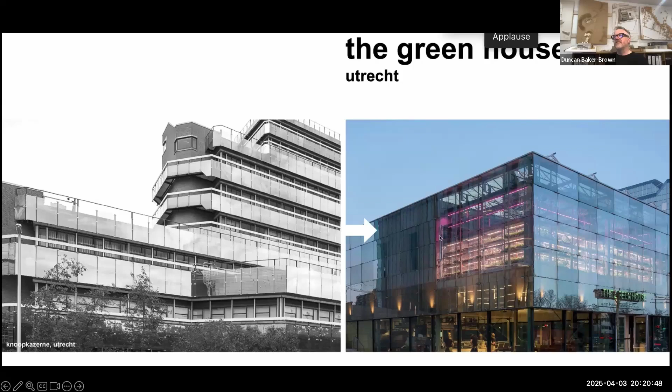So I'm going to end with two more slides. Some more good news is we're teaching it as well. And a lot of schools of architecture are teaching adaptive reuse. And I'll do more than two slides, actually. In Brighton, I've got a postgraduate studio called Hyperlocal. And we do resource mapping using Google Maps. So we get our material palette from different types of waste streams that we locate in the area that we're working on. So it's happening for real.